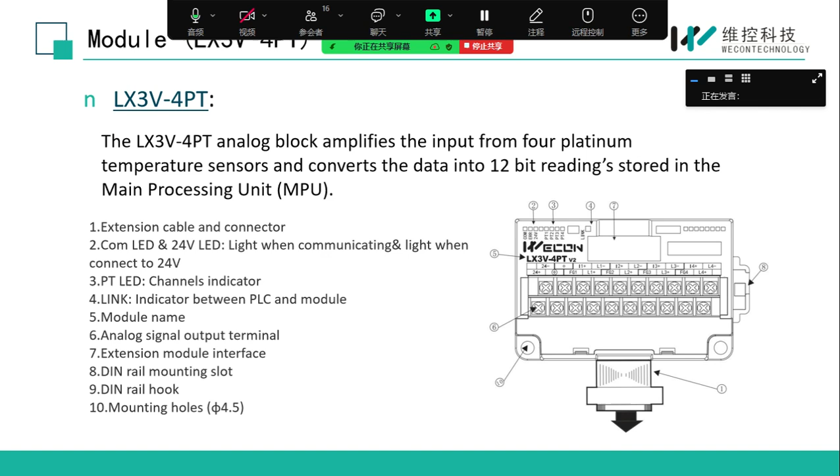And we can see there's also an LED indicator in this module, it's here. The COM indicator shows the state of communicating. When the DC 24 volt is connected to this module, the power lamp will be on. The PT1 to PT4 indicators show the state of each channel, and the link LED shows the state of communication between the PLC and the module.

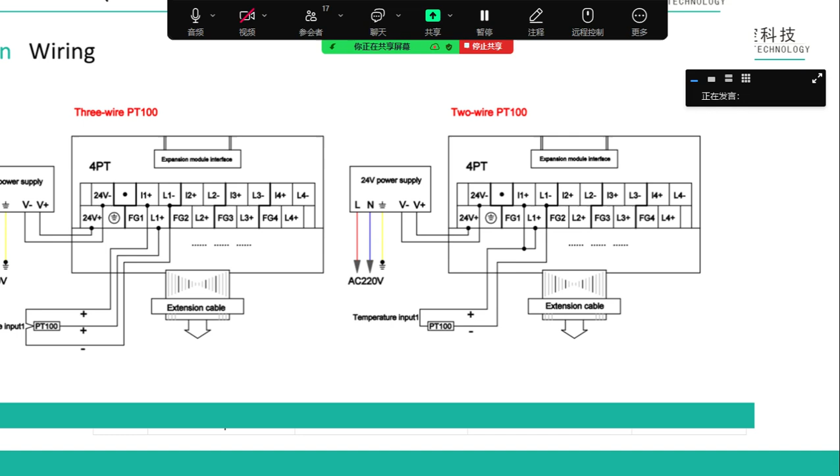This is the wiring of the different types of PT100 sensors. If you have a 3-wire PT100, you can connect the two positive wires to I1 plus and L1 plus, and the negative wire connects to L1 negative.

But if your PT100 just has two wires, just make a short connection between L1 plus and I1 plus here, and connect the negative wire to L1 negative and the positive wire to L1 plus.

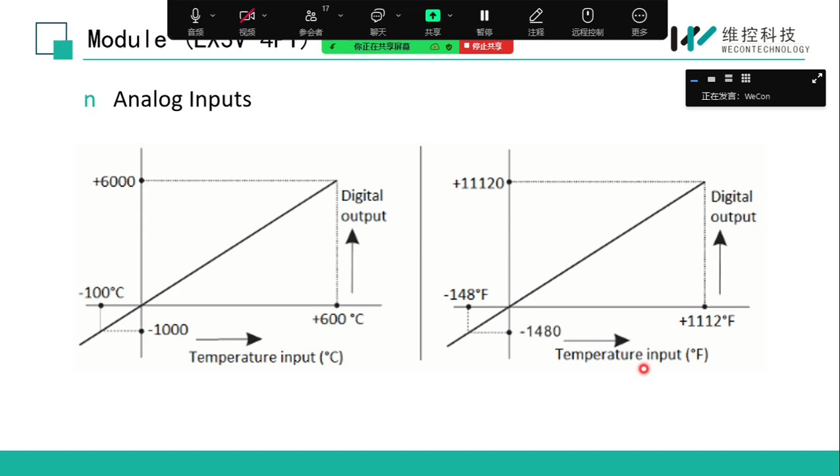And don't forget to apply the DC 24 volt to this module. This is the conversion characteristics for the LX3V-4PT. The high limit of the range is about 600 degrees Celsius, and the maximum digital output is 6,000. Our module supports both degree Celsius temperature and degree Fahrenheit temperature.

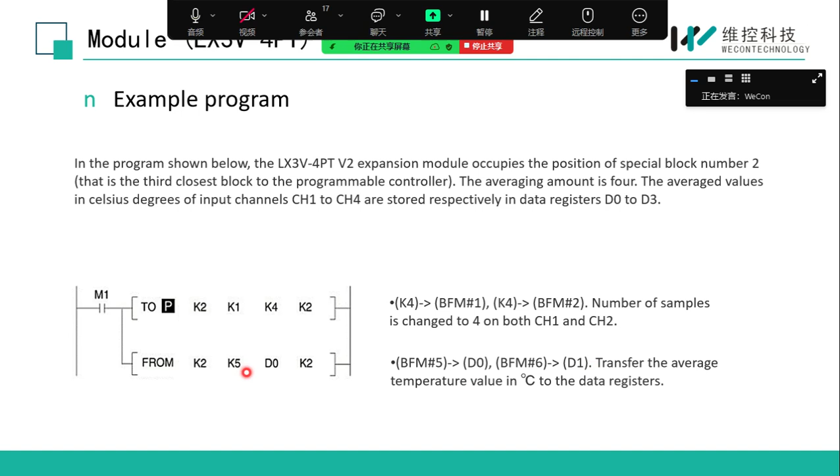Let's see this example. Here I used LX5V to connect the LX3V4PT module. As we can see, we judge the module we connect. Here 2040 is the module code. So by using the CMP instruction, if we connect the 4PT module we need, M1 will be on. And here we set the number of samples, and now we can get the value.

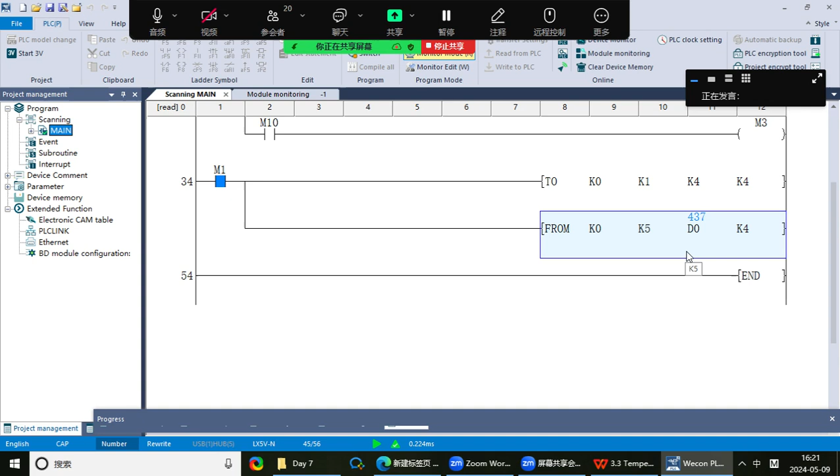Okay, let's move on.

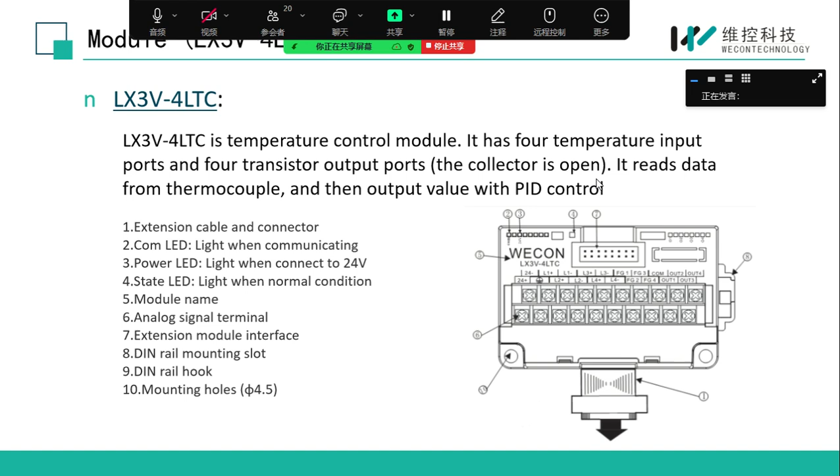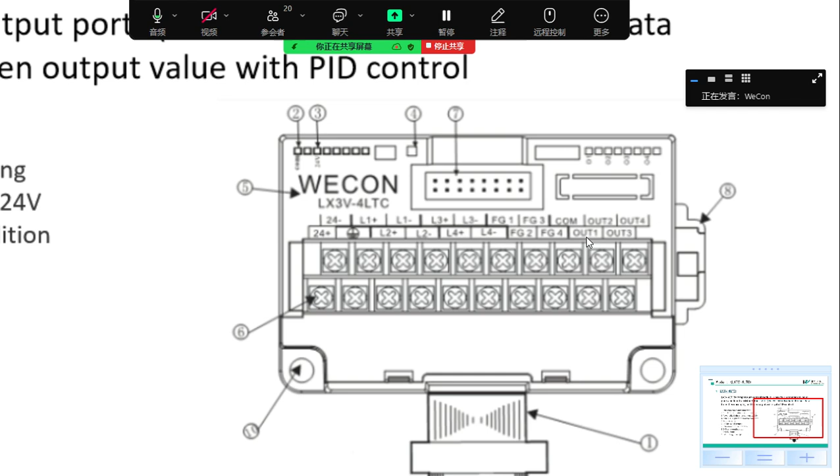The 4 input ports are here, as we can see: channel 1, channel 2, channel 3, and channel 4. And also the 4 output channels. This indicator is also the same as the PT100 module.

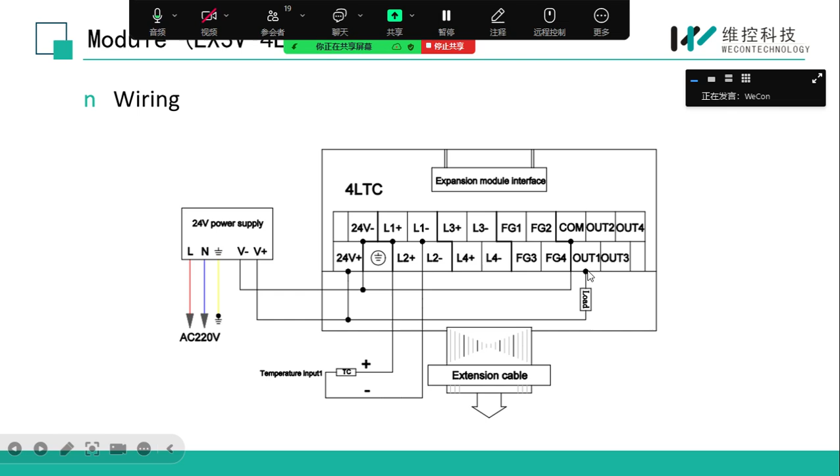This is the key buffer memory of this module. BFM0 is to choose the type of thermocouple to use the different value. B1 to B4 is the different channels' averaged constant of the filter. And we can get the average temperature in degrees Celsius in BFM5 to BFM8 for channel 1 to channel 4.

If we want to get a current temperature, just get a value from BFM 9 to BFM 12, and it also supports degree Fahrenheit.

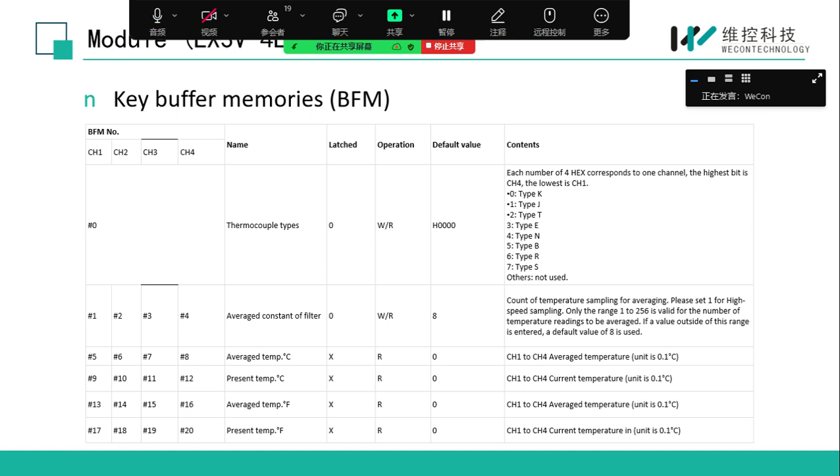This module, as I mentioned before, supports PID control. It also has key buffer memories for the PID control.

If we want to set the target temperature, we can set the value of BFM 45 for channel 1. If you use channel 2, you need to set the value of BFM 83. For channel 3, the value is BFM 121. And for channel 4, you should set the value of BFM 159.

For the control output value, different channels use different buffer memories. For channel 1, it's BFM 46, and for channel 2, it's BFM 84. Channel 3 is BFM 122, and channel 4 is BFM 160.

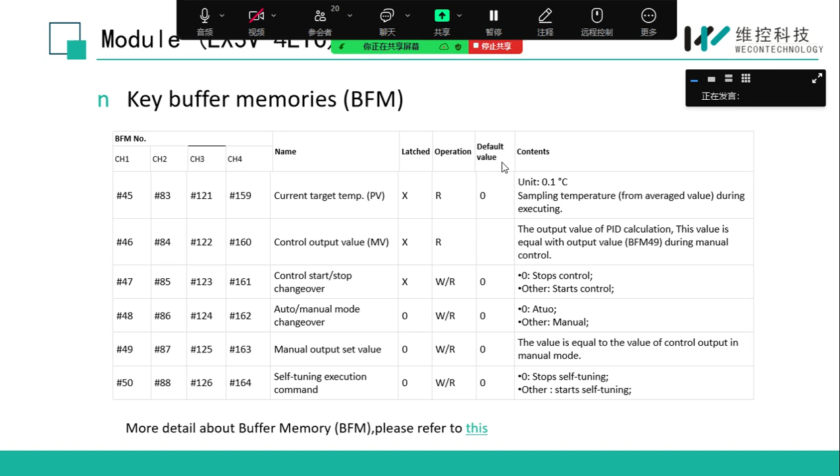Okay, this is the demo program for LX3V.

Here we can see we set the target temperature to 80 degrees Celsius, and set the self-tuning bias and the alarm mode, and set the upper limit alarm and the lower limit alarm. This part is for the initializer, and after that we start temperature control.

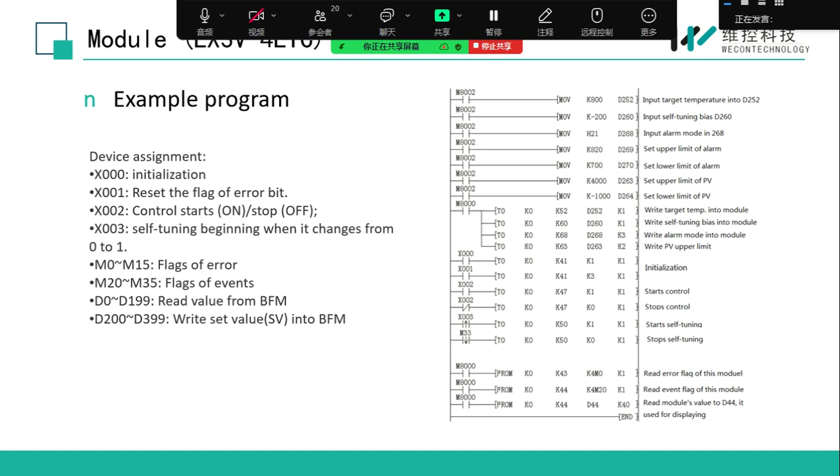Just wait a moment, I will download the demo program for a better demonstration.

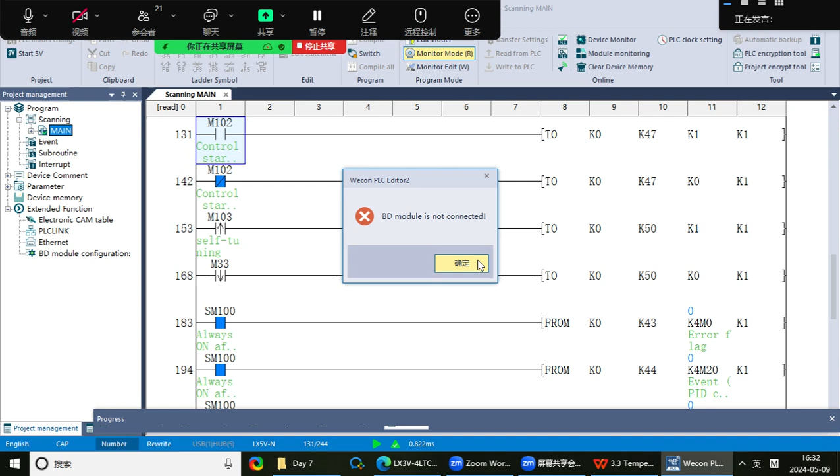Okay, as we can see now, I connect LX3V-4LTC module to LX5V. So let's look at this program.

At first, I set the target value, the target temperature, here 37 degrees Celsius. And I set the self-tuning bias and the range of PV, the output value. Here I set the range from 0 to 2000.

And I also set the value of alarm mode to 1. You can see it here.

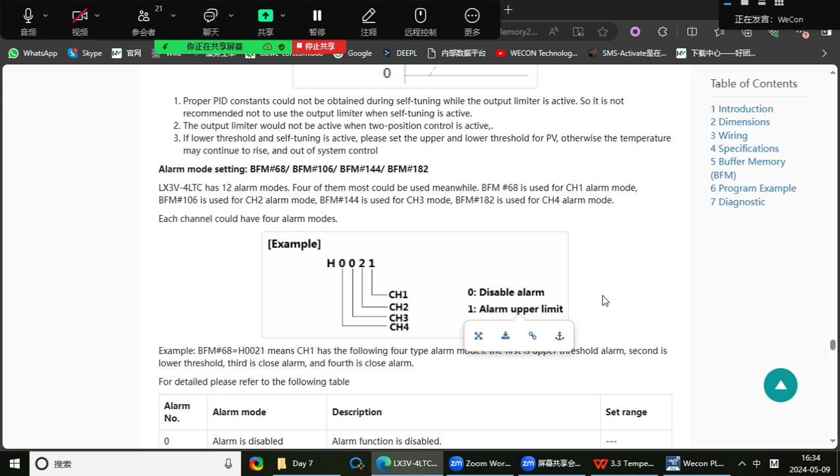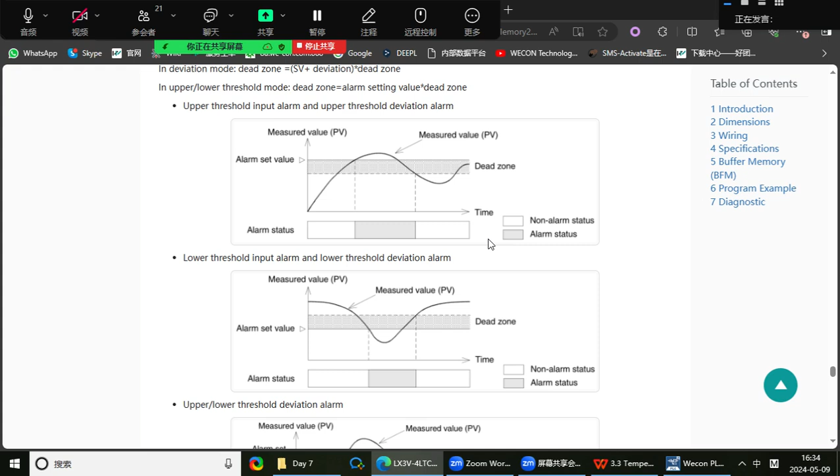If I set the channel 1 alarm, here I just set it as 1, so it means I use the upper limit alarm. So when the temperature is higher than the alarm value I set, it will trigger the alarm.

So the alarm value here I set is 50 degrees Celsius. And we use the TO instruction to write the value into the module.

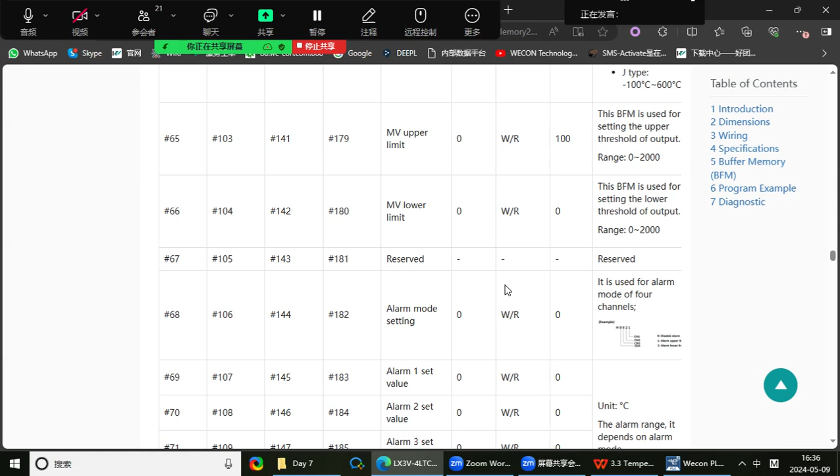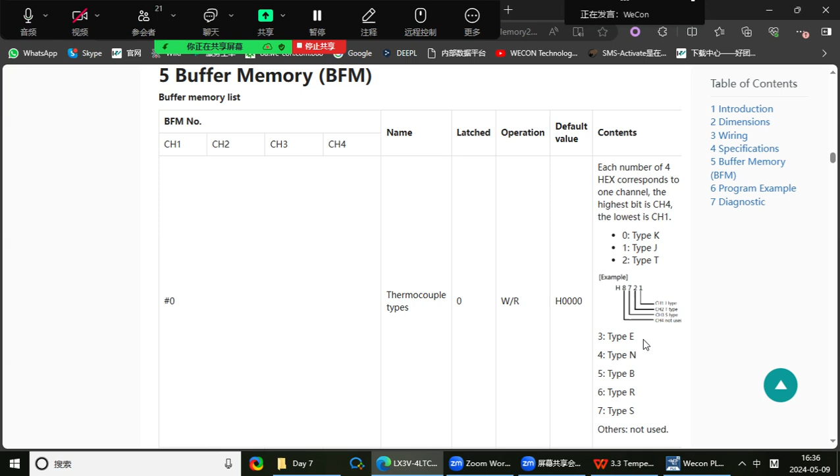This part is to set the alarm mode and the alarm value. And BFM 57 and 56 is the sampling cycle.

I set it as 4. And BFM 59 here is the control cycle. I set it here to 4, so it means 2 seconds - the control cycle here is 2 seconds.

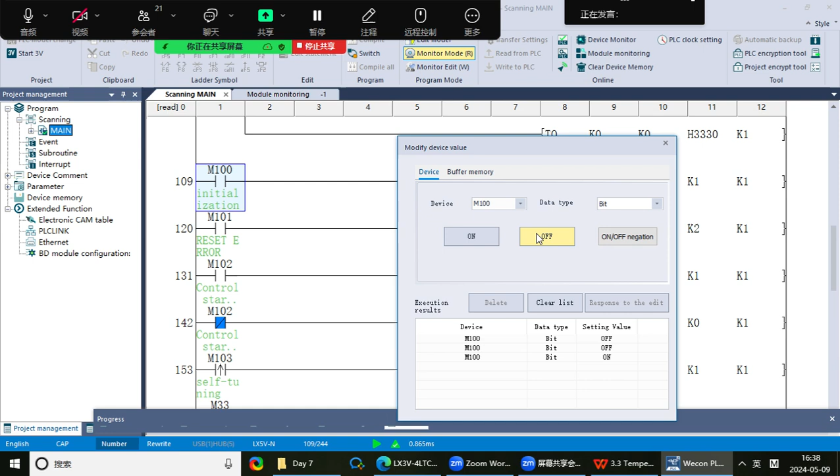So at first, we initialize the module and reset the error.

And now we can see the module getting the environment temperature. Now it's about 26, 27 degrees Celsius. And then there's no control output now because I didn't start the control.

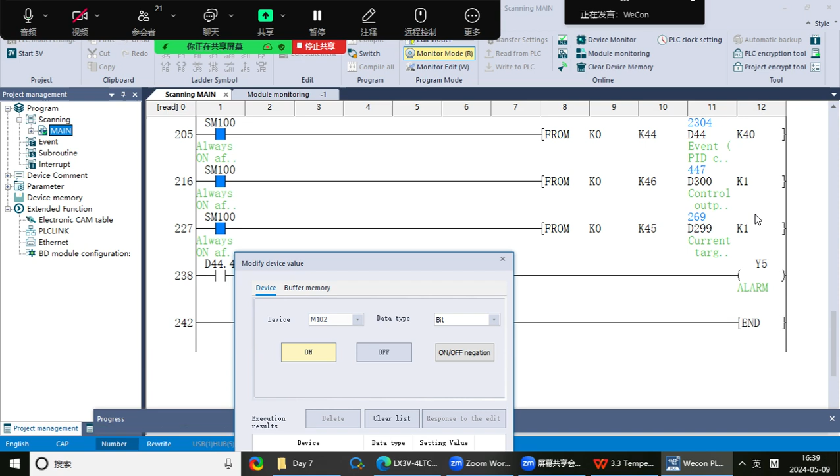And when I triggered M102, as you can see, the control output value is changed.

So if the temperature is lower than the target temperature we set, here I set it as 37 degrees Celsius... sorry.

Sorry, something's wrong with this computer.

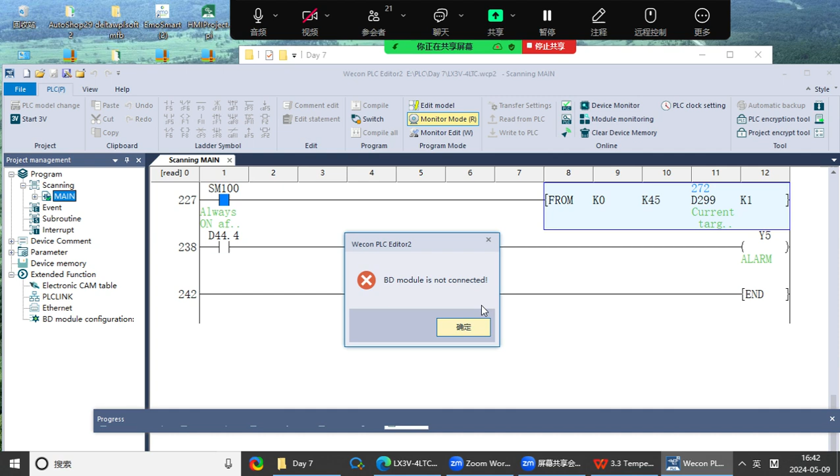Okay, this is weird.

Okay, let's restart it.

And now we start control. You can see now the control output value is increasing because the temperature is lower than the target we set, so it will increase the output to heat the system.

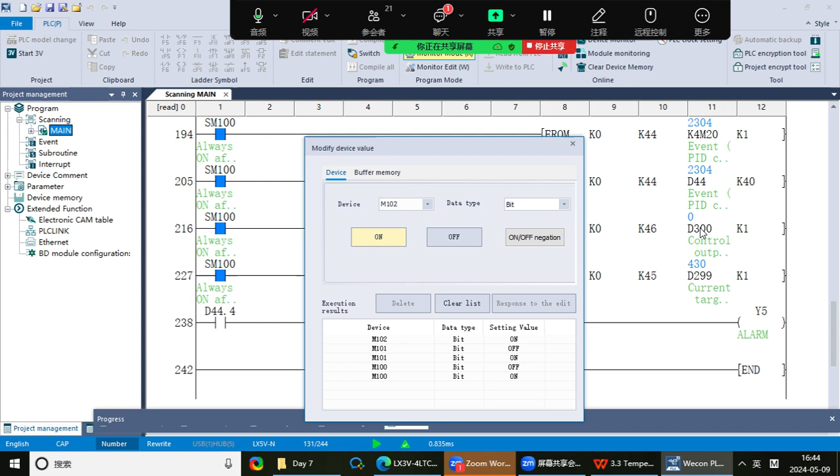Because the module noticed that even if there is no output to the system, the system temperature is still going up, and it's out of range.

It's higher than the temperature we set, and I put it out of the water, and you can see now the temperature is going down and the control output is increasing.

So this module will provide a PID control function. And let me show you the alarm function for this module.

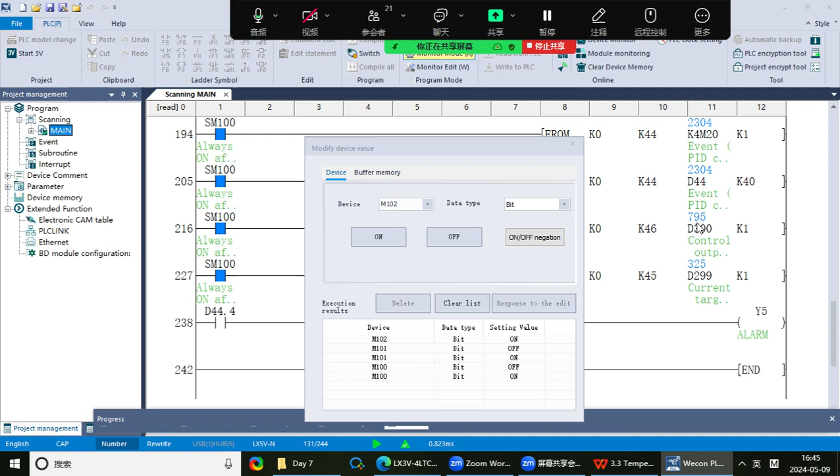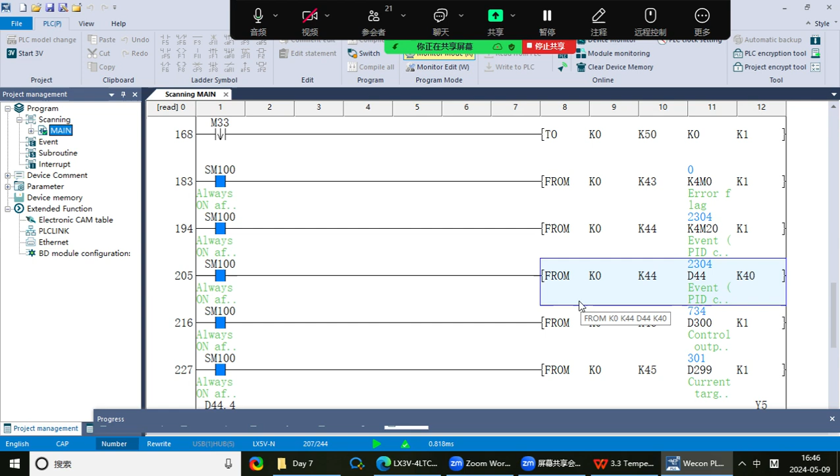Now I put the sensor into hotter water. Remember we set the alarm value here to 500, so it's 50 degrees Celsius. I get the PID event from BFM44 and send the value to D44. And as we can see it, BFM44.

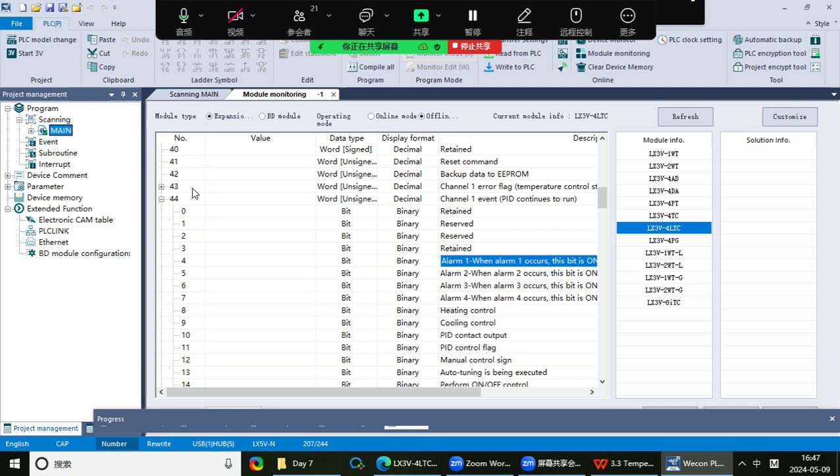Here BFM44, and bit 4 is alarm 1. When alarm 1 occurs, the bit is on. So this alarm is for the high limit I set here. So now the temperature is less than 30 degrees Celsius.

So now I put it in the hot water, with the temperature increasing. And when it is over 50 degrees Celsius, we can see D44.4 is on now. So if I cool down this temp sensor, you can see the alarm is released. We can see it again.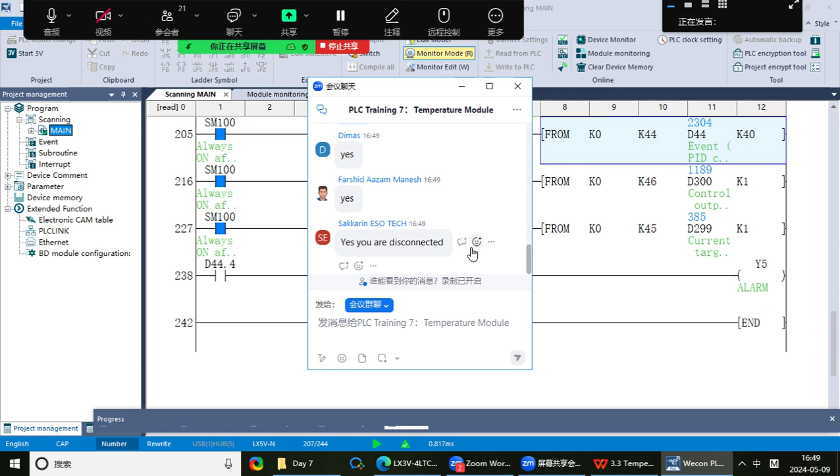Hello, can you hear my voice now? Hello? Sorry, can you hear my voice now? Okay, a disconnect just now. So let me show you again. Okay, now I am back.

Let me show the alarm function again. Now the temperature is lower than 50 degrees Celsius. We set the degrees here, and the alarm mode, the up limit alarm. So I put the sensor into the hot water. The temperature is increasing. When it's over 50 degrees Celsius, this bit will be on.

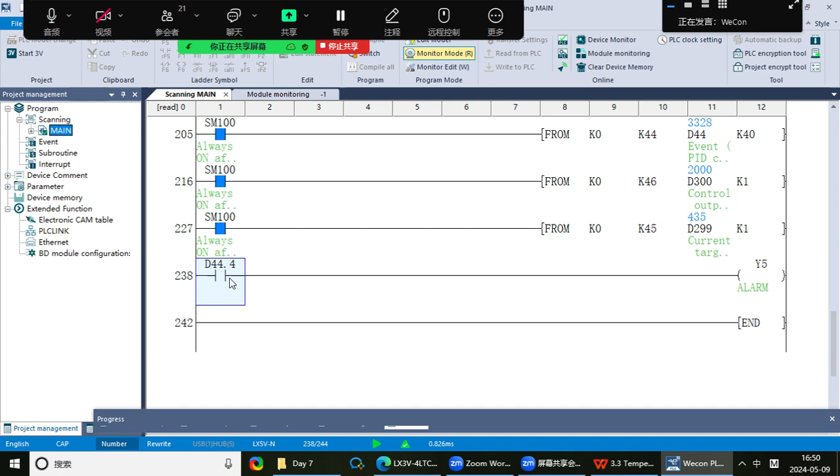Yes. So now I put the sensor out of the hot water, and the alarm is released.

So now, do you have any questions about this module, the LX3V4LTC?

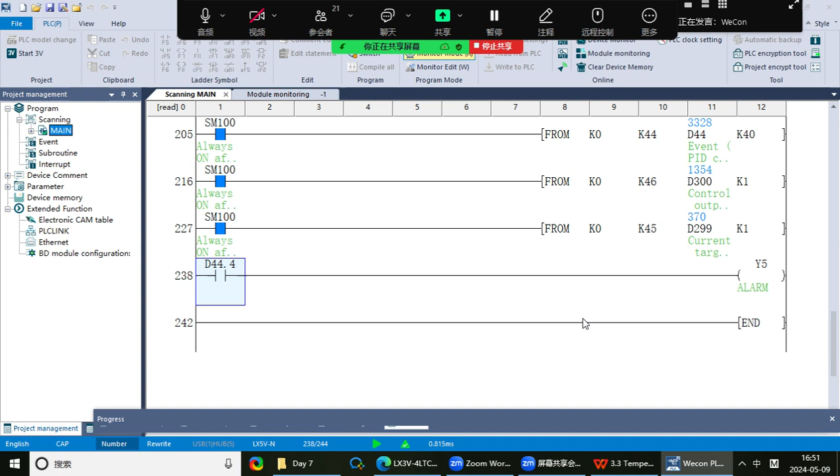So you can see the control output value is still changing based on the current temperature now. And if the temperature is over what we set, now it's 37 degrees, so the output is 0 now.

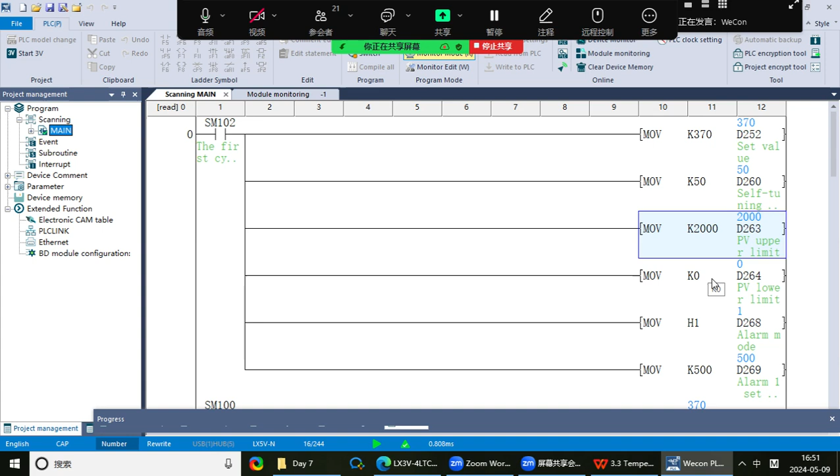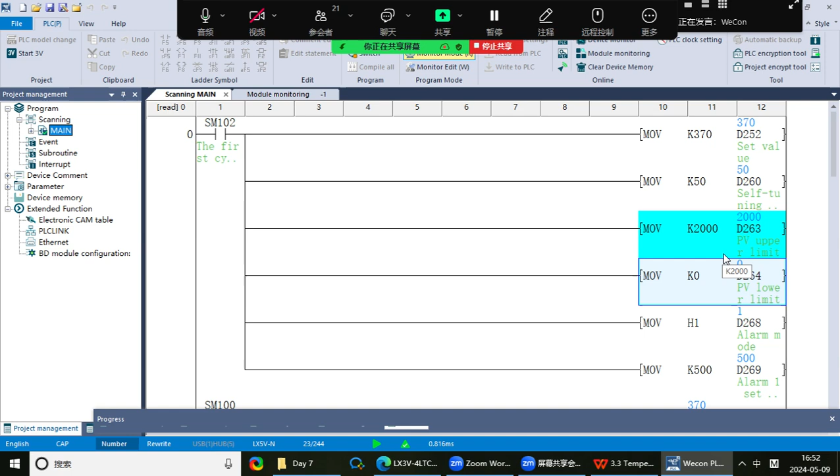You can set it here. So I set this, it's from 0 to 2000. So I write these two values in here, into BFM 63 and BFM 64. So here, these two.

And you can see here, the last parameter, I set K2 here, so it can write two address values: D263 to BFM63 and D264 to BFM64. Okay, do you have any other questions?

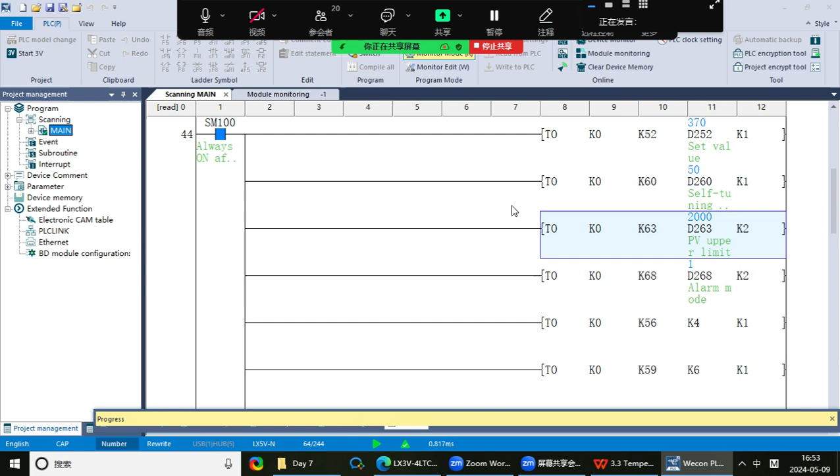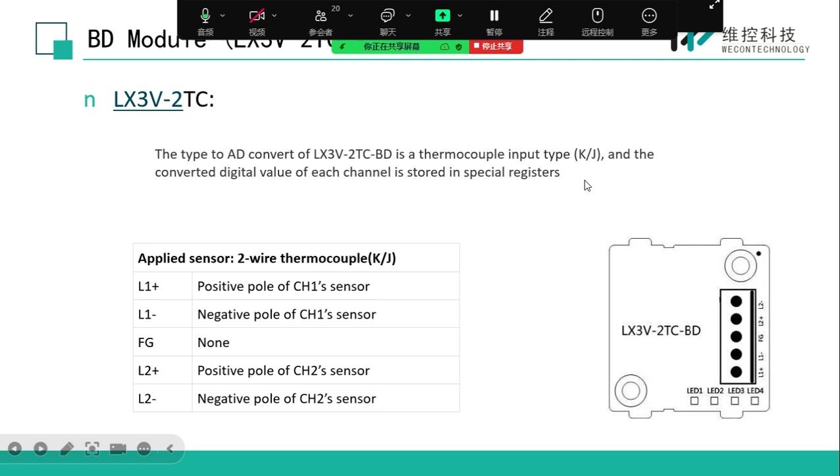BD module is much simpler than the expansion module. Just connect the sensor to different parameters, to different terminals. So here, LX3V2TC BD module has two channels, and it supports type J and type K sensors.

It also has LED lights to show the state for the power, for the communication, and the state of different channels. I just noticed if all the LEDs are flashing, it means the firmware version of this PLC is not supported.

So this is the wiring. And for all the BD boards, you can use the same special registers to get the value and set the input mode.

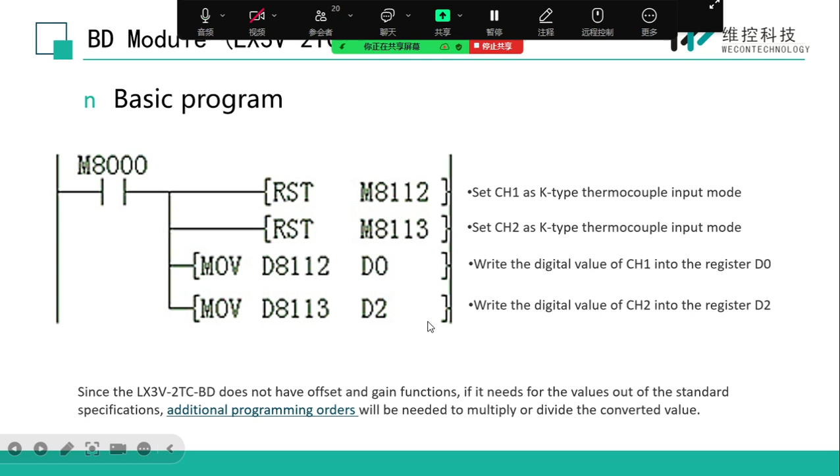So if you want to get more information, you can also get it from our support center. We also have an LX3V-2PT-BD module, so you can also work with the PT100.

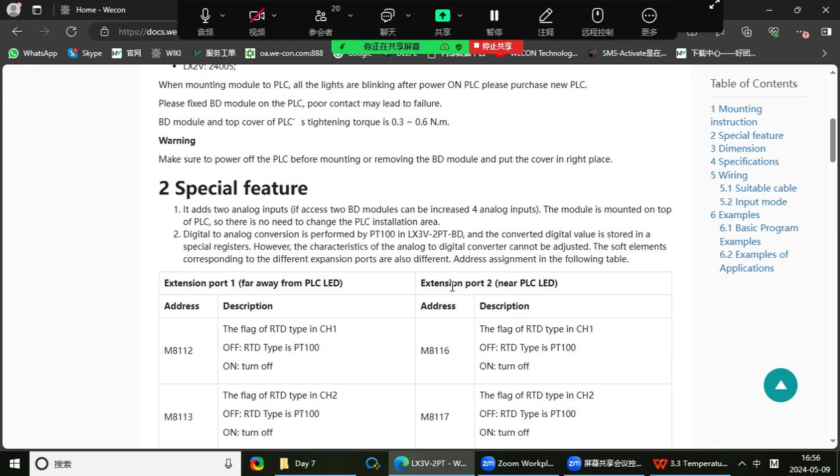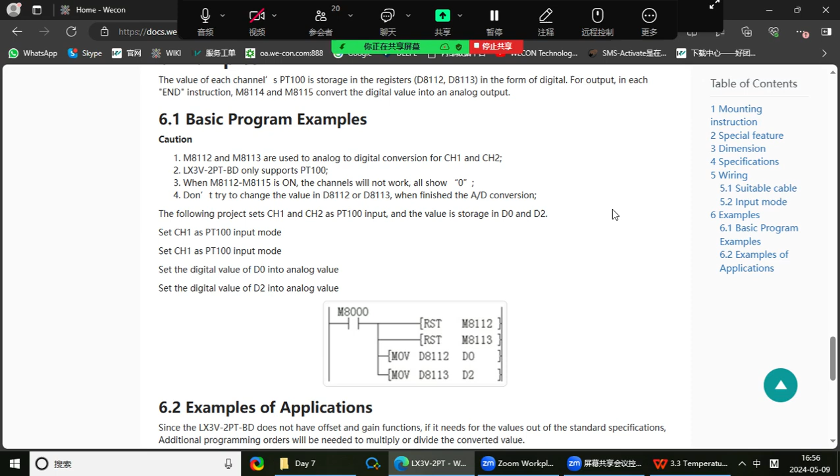Okay, it's not many differences with other BD modules. So we can move on to the LCM module. As we know, all LCM modules communicate with the PLC by the Modbus RTU protocol.

Let's introduce the LCM-4TC module. As you can see, it supports type J and type K sensors and has 4 channels. Also, you can see the module state by the different indicators.

So when the module is working normally, the link indicator blinks, and the communication indicator also blinks, and the TC indicator is off to show the analog input is in range, and the error indicator is also off.

This is the example demo for the LX3V. So for LX3V, we need to set the communication parameters by these special registers. So here is the list part, and we set the RS instruction parameters. So here, we set the station number is 2, so the higher word is 2 here.

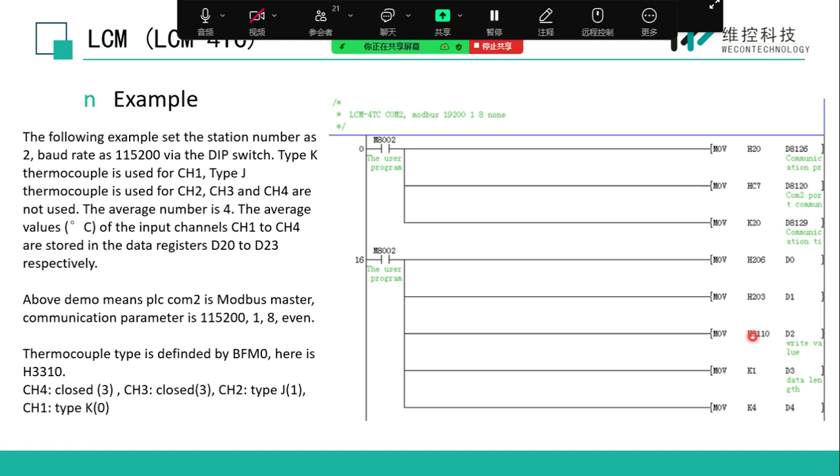And if we want to write the value, the function code is 6. And if we want to read value, the function code is 3. So we use the RS instruction to communicate with the LCM module.

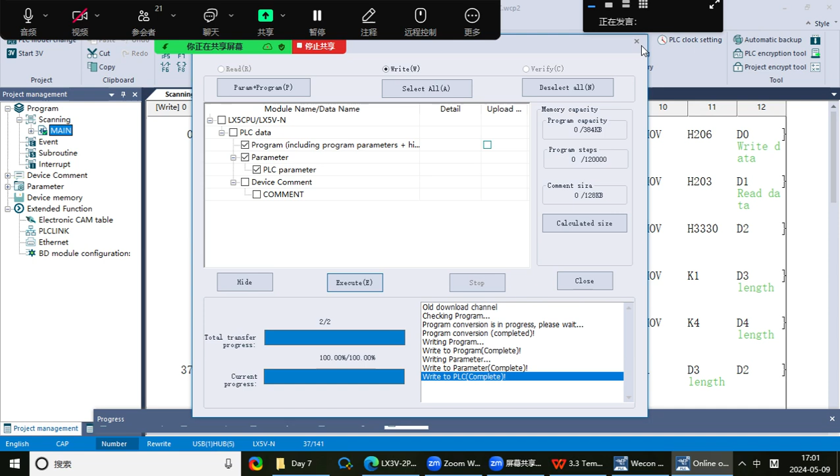Let's see it in a real program. Just wait a minute, I need to connect the module to the PLC.

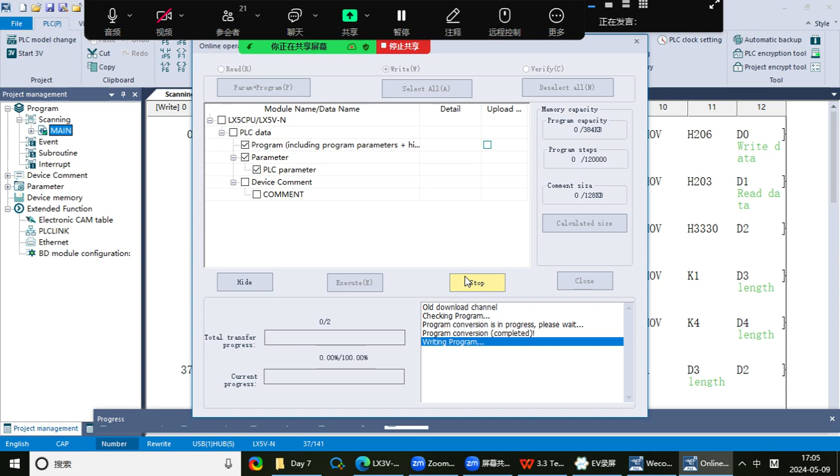Okay, now let's see this demo. At first, we should set the communication parameters. So here I already set the baud rate to 9600 for this module, and the stop bit is 1. Parity is even. So don't forget to set the station number for this PLC. I set it as 1, so it means the PLC is the master station.

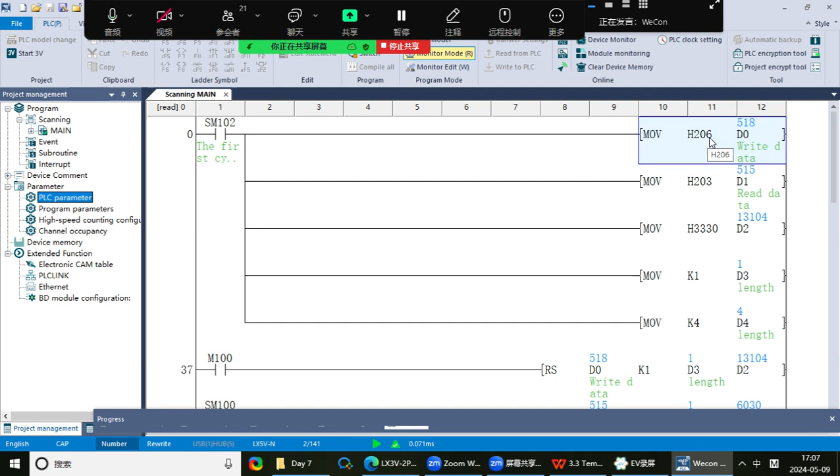And now we set the parameter of the RS instruction. I already set the station number here. The station number of this module is 2, so the value is 2 here. And if I want to write the data, I set the function code to 6. And if I want to read the data, I set the function code to 3. And I use the type K sensor, so I set the last bit to 0. And set the different lengths of data.

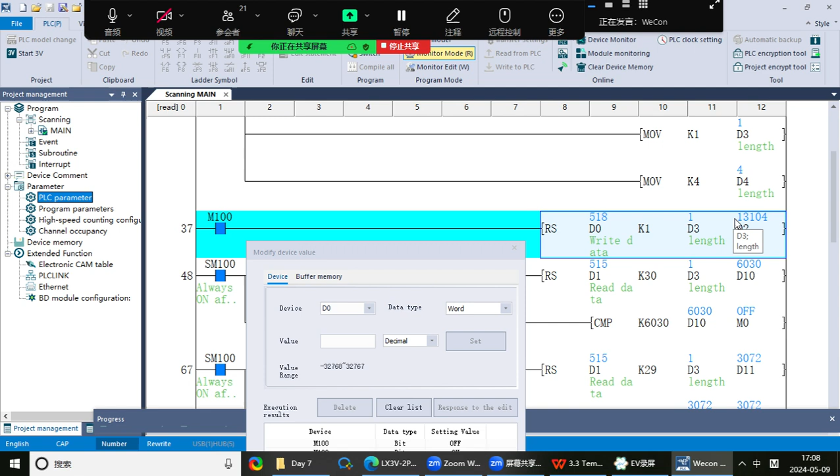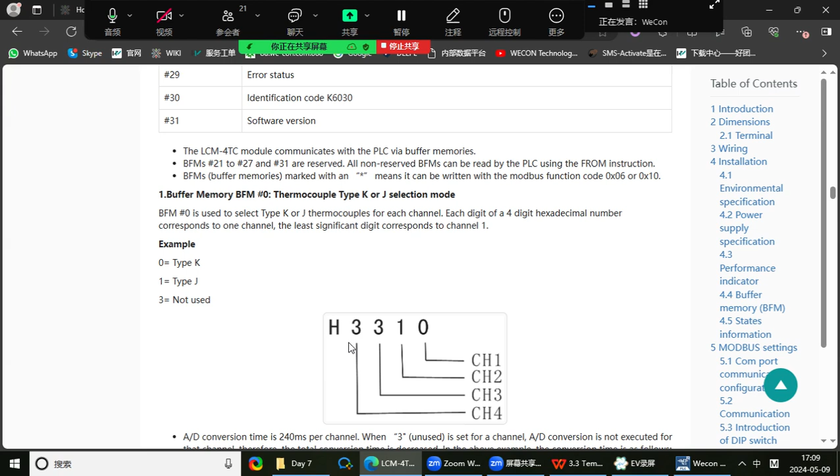And at first, in this instruction, we set which type of sensor we connect to the module. And then here is BFM 0 to set the sensor type. Zero means type K, and the 3 here means not used. So in this program, I just connect one sensor, type K, in channel 1.

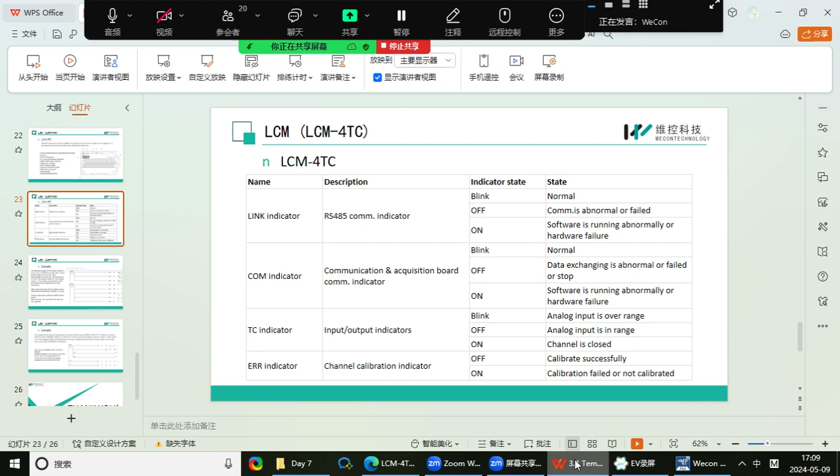And then we read the data from BFM 30. As we can see, we get the code of this module to check whether it is K6030. If it matches, the M1 will be on automatically.

And we use the RS instruction to get the value from BFM5. The BFM5 is the average temperature in degrees Celsius. The unit is 0.1 degrees Celsius. So here it says the average now for the environment is 26.1 degrees Celsius. And it also supports getting the value in degrees Fahrenheit.

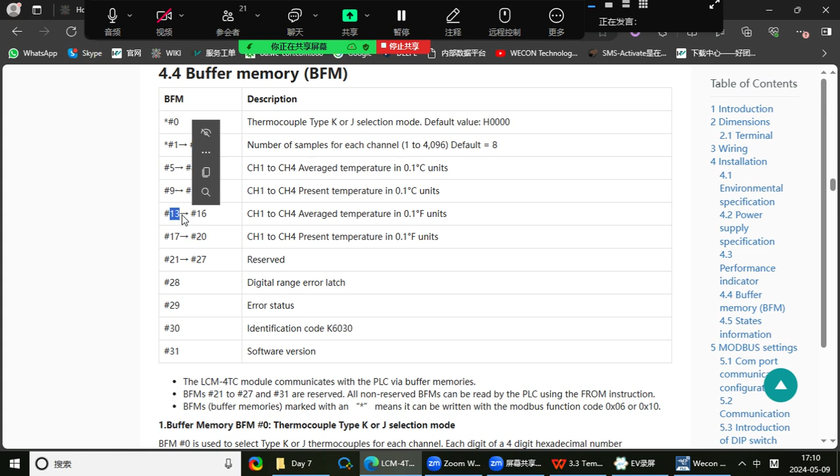The channel 1 BFM 13. Actually, I use the RS instruction to get the 4 values from each channel, but I just connect one sensor.

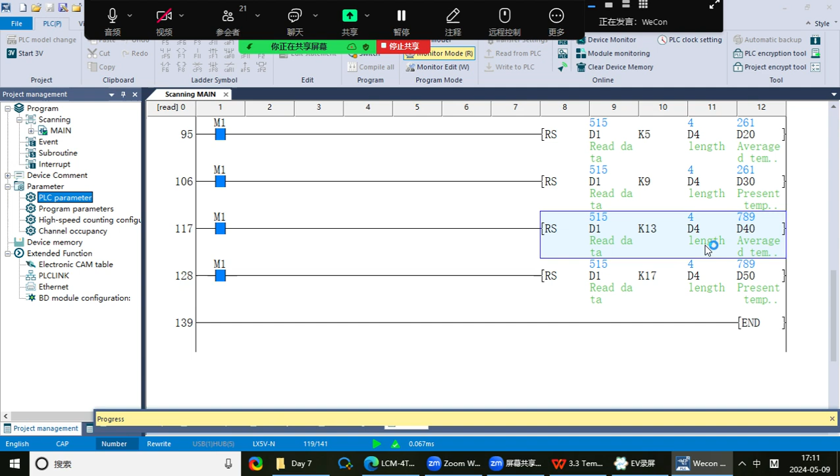And we can also get the error state from this module. BFM29 is the error state. So here I connect it, and I get the value from BFM29 to D11. And by using the MOV instruction, we can map D11 to the BFM bits, bit 0 to bit 15.

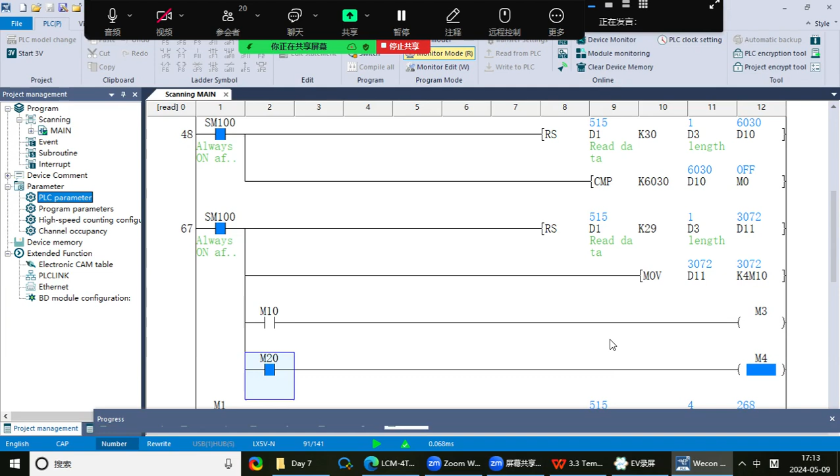So as you can see, M10 here is off, so it means no error in bit 1, bit 2 and bit 3. And M20 is on, so it means BFM29 bit 10 shows the error: the digital output or analog input value is out of range. Because this module has something wrong, I cannot clear this error.

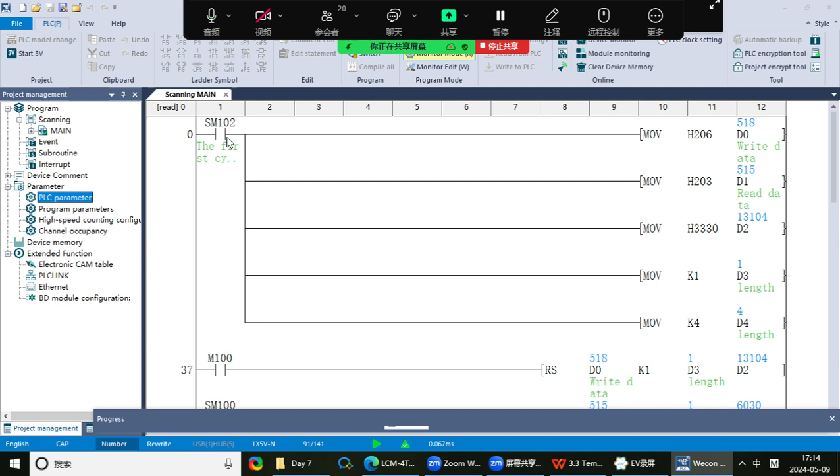Do you have any questions about this module? Just remember, if you use this module, you no longer use the FROM instruction or TO instruction. Instead, you use the RS instruction, because you communicate with the module by Modbus RTU protocol.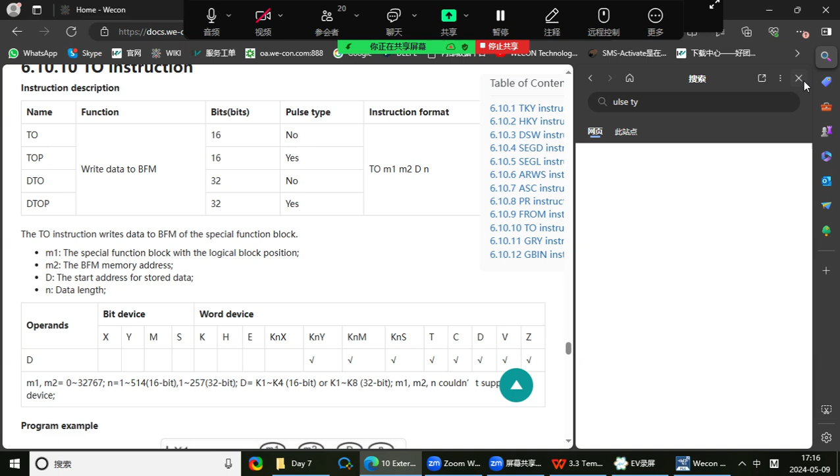No, DTO is about the length of data, but TO and TOP, it means the instruction is pulse type. So here, for example, if you use TO here, when M1 is on, this instruction will continue to write the value to BFM1 all the time, just when M1 is on.

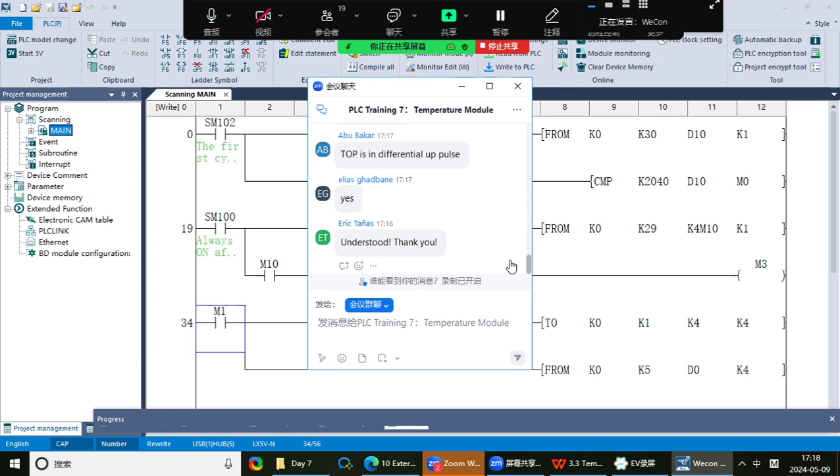But if you use TOP here, when M1 goes from off to on, it will write the data to BFM1 just once. So if you want to change the value you write to the module, you need to trigger M1 a second time. Okay, it's also the same for FROM and FROMP. You read the data from the module all the time or just once.

The length of data is for the D here. That's the difference between DFROM and FROM. It's for the bit length. Okay, do you have any other questions?

Okay, if some questions occur when you use these modules, just feel free to post your questions in our group. After the class, I will also make an after-class exercise, so please submit it on time. And I will also share these 3 demo projects in the group, so please check them. I think it will help you better understand these 3 modules.